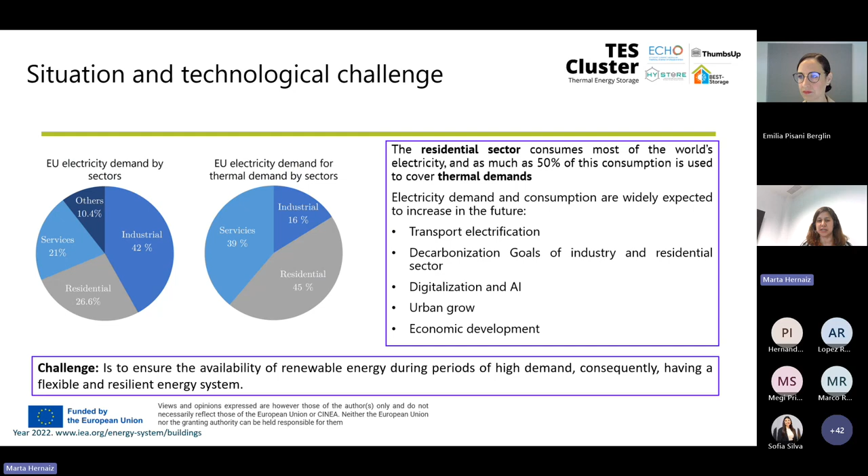This makes it essential to consider energy storage. As you all know, energy storage enables renewable energy to be stored and used flexibly, ensuring its availability during peak demand periods. There are different strategies or solutions to cover energy storage, both electrical and thermal. However, in the residential sector, where the demand is primarily thermal, thermal storage is the most suitable option.

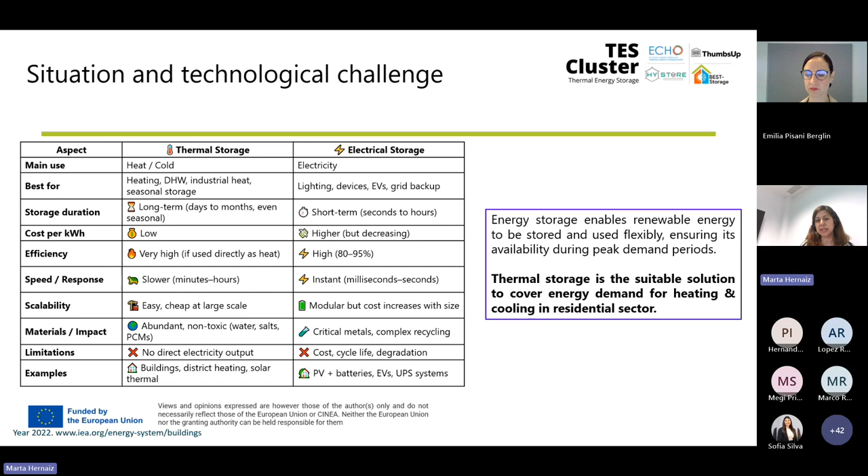This is the point where the BEST storage project emerges. One of the objectives of this project is to explore different alternatives to water as a storage material to meet the cooling demand. In this context, BEST storage has proposed two different alternatives, two phase change material slurry concepts, which are currently being studied by OST, Avanzare, and Tekniker. The main advantages of these slurries as storage materials are that the storage temperature can be adjusted to match the cooling demand temperature, a higher storage energy density, reduced operating cost, a more compact solution, and increased chiller efficiency.

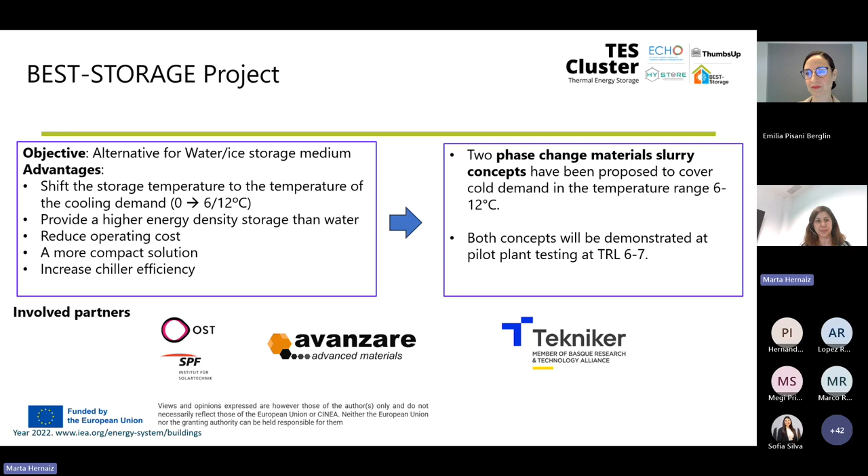In the second PCM concept, to charge the system, the liquid emulsion is pumped from the storage vessel through the heat exchangers, where the phase change material crystallizes, generating a phase change material slurry. This is a mixture of solid and liquid PCMs. This slurry is then pumped again to the discharge section where the solid PCMs melt again.

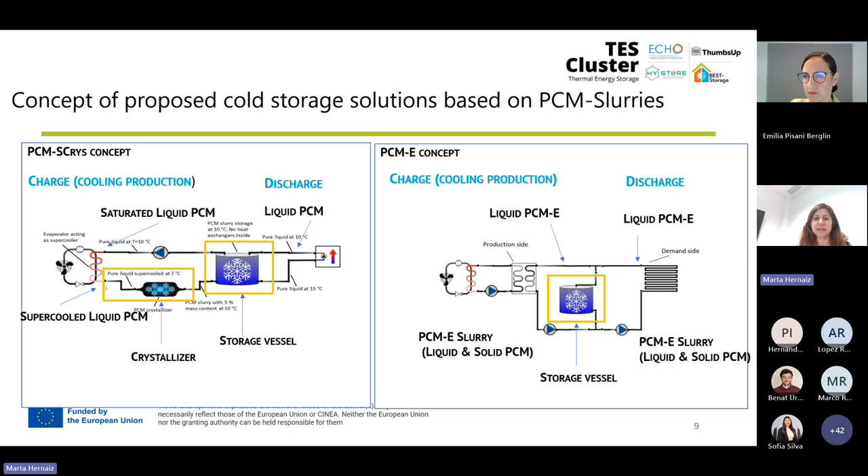If we look in detail at the first concept, the PCM crystallization concept, we have to remark on the following features: only a liquid PCM is recirculated through the system, cooled or supercooled, and in the storage tank, both the crystallization and the slurry management take place. To achieve the TRL of the system, we are working with a 500 liter lab-scale crystallization vessel for testing.

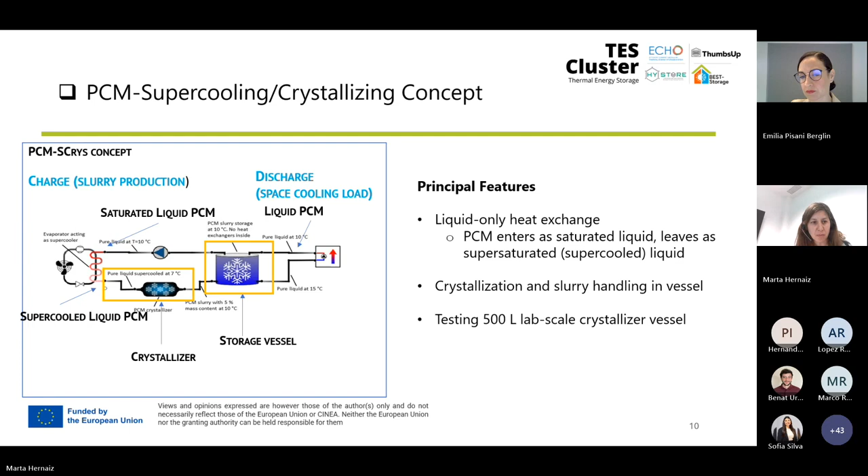For this concept, regarding the storage material, we have decided to work with inorganic salt hydrate salts. These materials are very interesting due to their unique properties: you can tailor and customize the phase transition temperature by working along the solubility curve with water. So depending on the water or coordination molecules of water, you are able to customize the melting temperature. The main advantages of this material are the high density they provide, the high latent heat linked with the storage capacity of the final system, the safety aspect, and also the stability and cost of these materials.

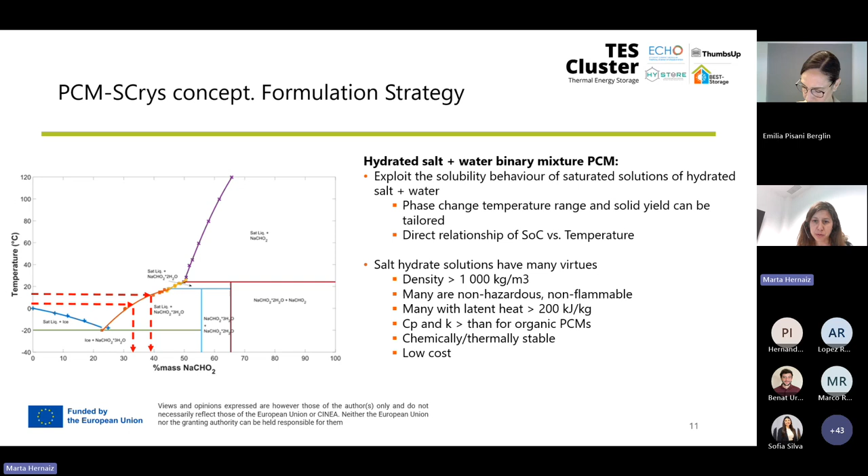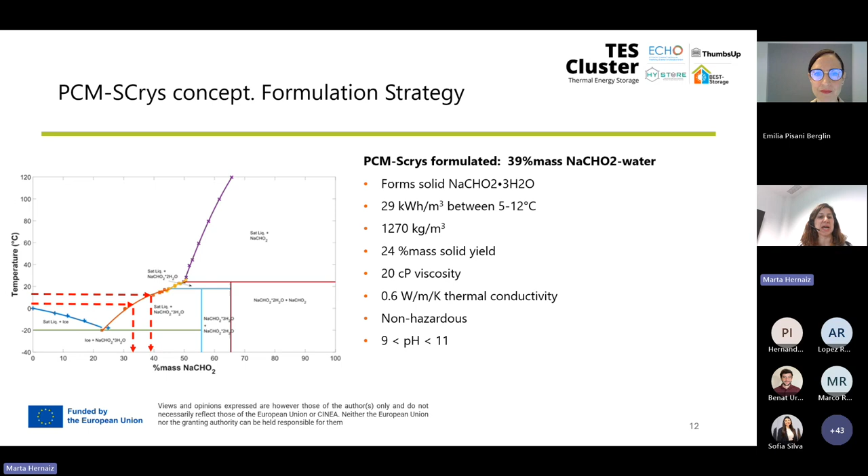Up to now, we have selected a slurry based on sodium formate, 39% in weight in water. This material has an energy density of 29 kilowatts hour per meter cubic, which means 5 times higher density than the reference material, water. Also, we have enough good thermal conductivity, very low viscosity, and we are handling a non-hazardous material in the pH range between 9 and 11.

If we move to the second concept, the PCM emulsion concept, the main features are that the slurry has a phase transition as it passes through the heat exchangers: a slurry containing a liquid PCM during the discharge system, and a solid PCM during the charge system is pumped. So we have to manage different properties of the slurry depending on whether the system is charged or discharged, and this affects the operation and also the design of the full system. To reach the final TRL, we are considering working with a 600 liter lab scale vessel.

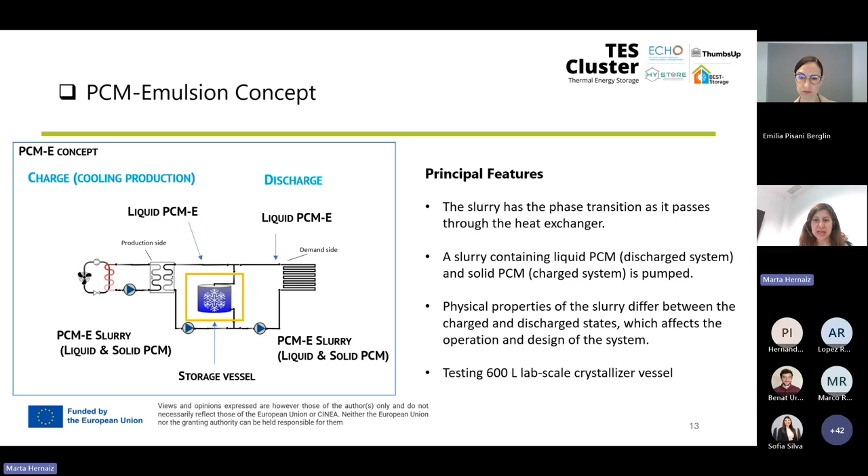For the PCM emulsion formulation, the formulation strategy is a key part. For this concept, organic PCM has been selected for emulsion formulation in water, and we have to consider the main specifications for the slurry: we need a liquid with high energy density, we have to avoid or reduce the supercooling behavior of the emulsions, formulate stable emulsions, and control the slurry viscosity. All these aspects must be considered during the formulation because they are directly linked with the design of the final system.

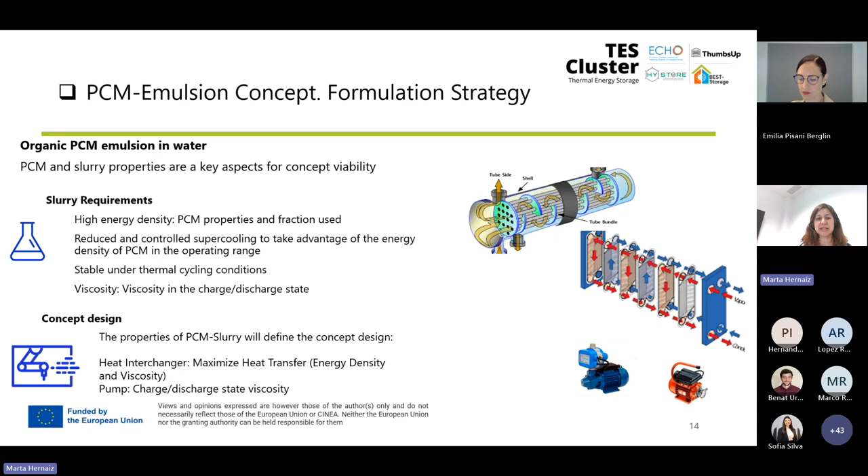And to select the critical components of the system, such as the configuration of the heat exchangers and also the pump, which are the key elements of the final system. So during the formulation, the most important properties that we have considered are the stability, the viscosity, and the supercooling.

But there is an important question: is it possible to obtain an emulsion that meets all of these requirements, or not? Is there any property that is more important than the others? During our experimentation, we found that it was not possible to meet all the requirements defined for the emulsion: very low viscosity, very high stability, higher energy density, and reduced supercooling, all at once.

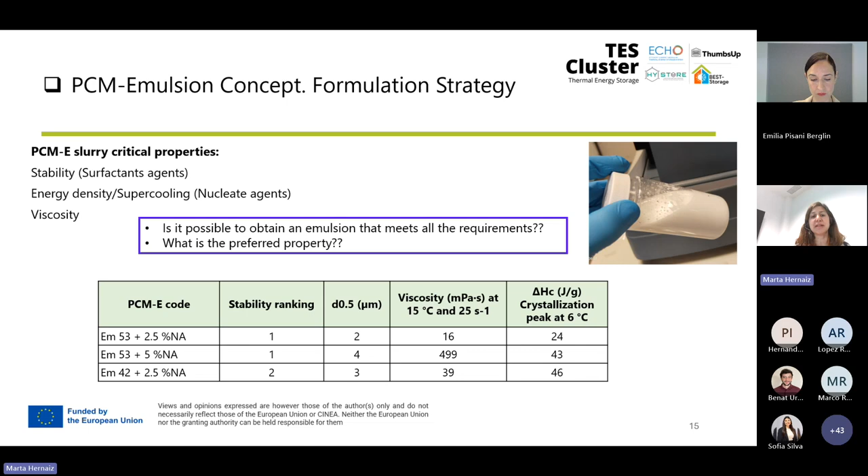So, to sum up, to achieve the decarbonization goals for the European Union, the energy sector requires energy storage solutions. Thermal energy storage is the best way to meet the heating and cooling needs in the residential sector.

In the BEST STORAGE project, we have developed 2 storage alternative concepts. The first one is a PCM crystallization based on inorganic salts, and the second one is an emulsion based on organic PCMs. Compared with water, the reference system, we have achieved a storage capacity higher by a factor of 5 and 3 respectively. So to achieve all these results, material science and also the system device design is a key issue to improve storage performance, and all the new concepts require a redesign of the operational system to adapt to the new materials and new strategies.

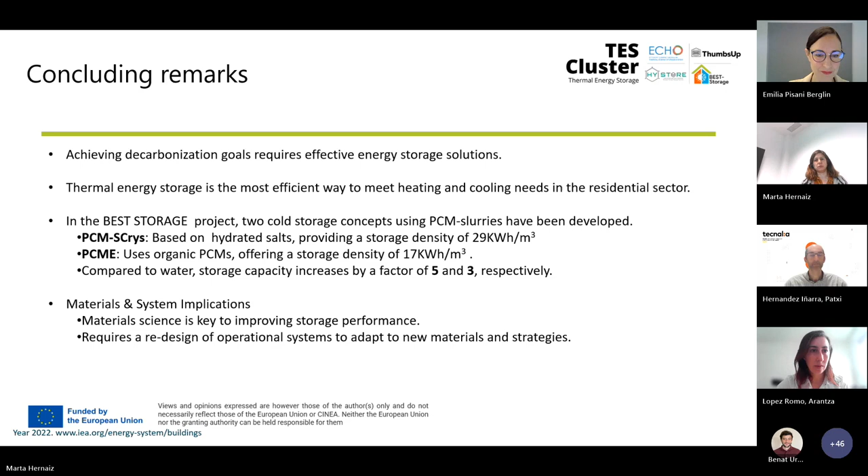Arantza, the life cycle greenhouse gas emissions of heat supply in buildings vary significantly across different countries and cities in Europe, from cities with efficient and decarbonized heating networks to those that remain heavily reliant on fossil fuels. The potential impact of thermal energy storage on decarbonizing heat supply must be carefully evaluated for each case, and this is what you're working on. In this presentation, you will explore the potential of thermal energy storage, especially the ones being developed by the ECHO project, to decarbonize heat supply in the city of Bilbao, Spain.

Currently, the city's heat supply is approximately 80% reliant on natural gas, presenting a significant opportunity for decarbonization. You will examine how conventional thermal energy storage and ECHO thermal energy storage, in combination with heat pumps, can support decarbonization. The analysis includes a prospective hourly evaluation of greenhouse gas emissions in the Spanish electricity grid until 2030. I will not give more details because I don't want to spoil the presentation, but please, Arantza and Patxi, the floor is yours.

Well, good morning everybody, and thank you, Emilia, for introducing us, and for the opportunity of presenting our developments at the ECHO project. I'm going to start with an overview regarding the ECHO project and the methodology that we are using, and then I will give the floor to my colleague Patxi, who will present the preliminary results that we are obtaining. Thank you very much also to Marta for presenting the challenges that this type of project is trying to address, which are common among BEST Storage and the ECHO project.

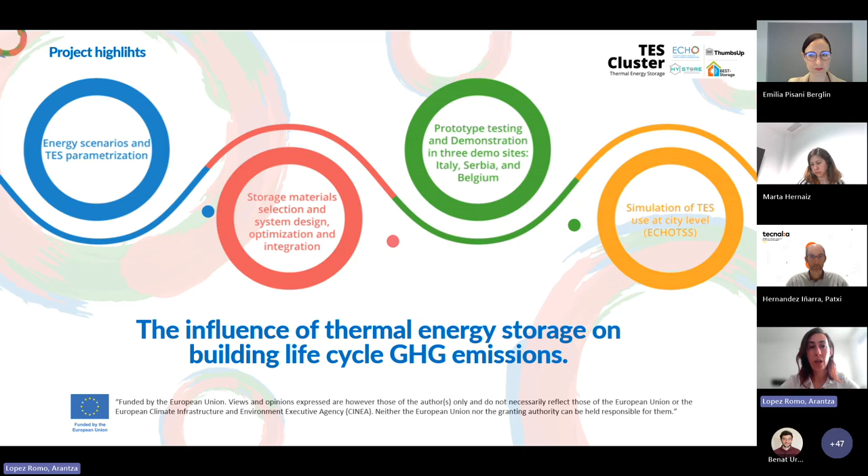In this type of project, we usually analyze the environmental impacts of the system under development by itself. But in this case, we aim to scale the analysis in order to try to understand the influence of thermal energy storage on building life cycle greenhouse gas emissions. For this purpose, we are including in the analysis 3 different cities, so we can understand the role that thermal energy storage can play in decarbonizing the heat supplied at city level.

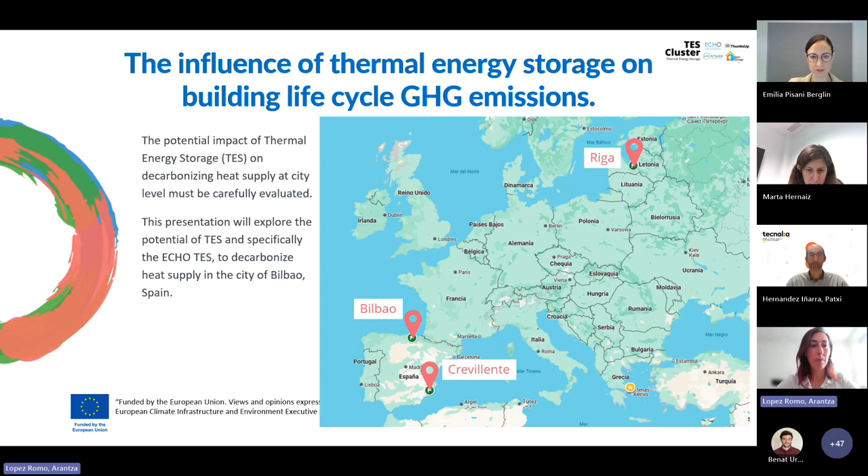In this specific presentation, we are presenting the preliminary results that we are getting for the case of Bilbao. Bilbao is a city located, if you don't know it, in the north of Spain. There are some issues regarding this, but what is most important is that approximately 80% of the heat supply is covered by natural gas, which means it presents a significant opportunity for decarbonization.

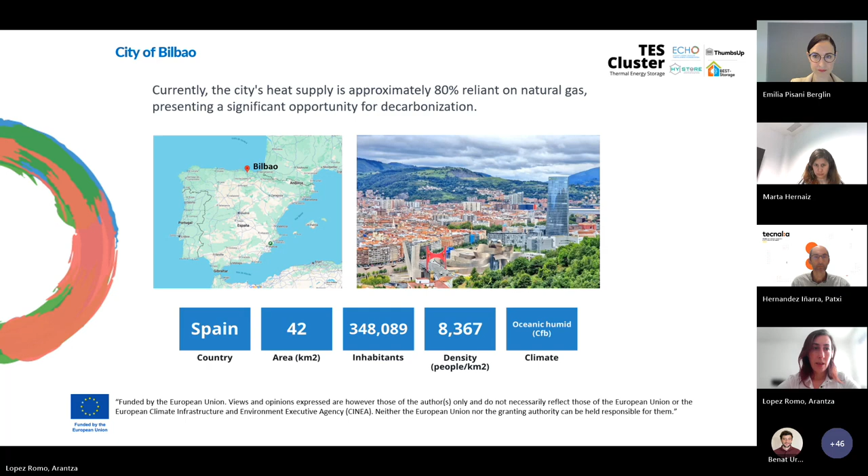But here we are using a quite innovative methodology, because we are considering a prospective energy generation at the use phase of the system. This means we are not only analyzing the electricity mix today in Bilbao, or the Spanish electricity mix nowadays, but also including what the Spanish electricity mix will be in 2030, with the aim of capturing the expected more renewable electricity mix we will have in the future.

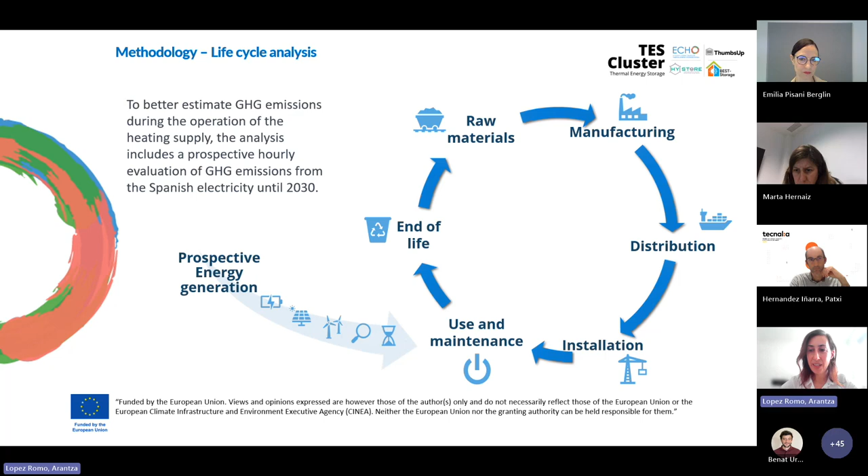And here is when I'm giving the floor to my colleague Patxi, who is going to explain further why it's interesting to include this prospective approach. Thank you, Patxi. Okay, thank you, Arantza. Can you hear me and see me well? So I will tell you the approach.

I will dig into the preliminary calculations we have done for the ECHO TES thermal energy storage, and compare it with more conventional solutions, like the one covering nearly 80% of the area in Bilbao, natural gas boilers for heating and hot water. We will also compare with a solution being implemented in some places in Bilbao: heat pumps with conventional thermal storage systems.

That is a big change and already has many benefits. So we will compare three things: natural gas, heat pump with conventional thermal storage, and heat pump with the ECHO TES thermal storage, which is the thermochemical storage. So how will we compare?

We will evaluate the electricity mix, how it is now and how it will evolve in the future, mostly aligning with the National Energy and Climate Plan for 2030, extended a bit to account for these solutions lasting 20 years. So over this 20 year horizon, we simulate how the electricity mix will evolve. In 20 years we hope to reach more than 90% renewables in Spain's electricity mix. We are already over 50%, and in 2030 we expect 80%, and by 2045, the end of this study period, we will be nearly or more than 90%.

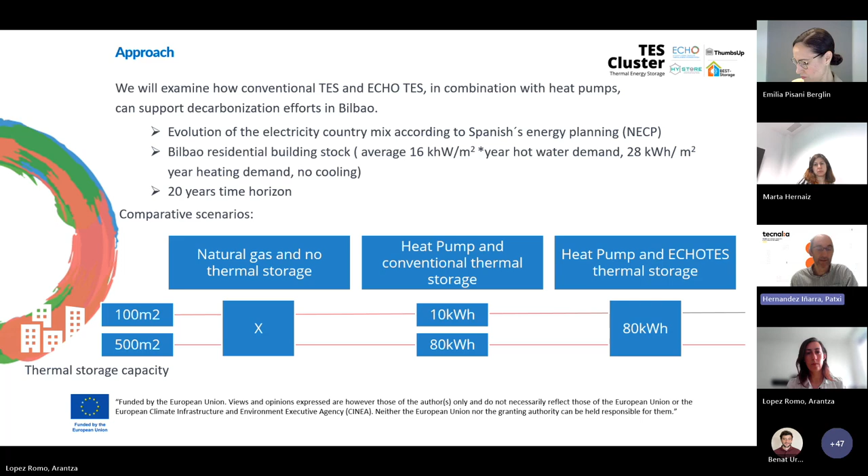So the idea is to compare our solution with conventional solutions using heat pump and storage of different capacities, and with natural gas, which normally doesn't need storage because they use high power boilers instead. That's how we will compare.

There are a lot of calculations and assumptions; I'll try to explain quickly how we do it. To operate a conventional storage with a heat pump, you see at the top the black hourly data showing electricity use to operate the heat pump with storage, and at the bottom the yellow line showing the storage capacity going up and down — a conventional storage charging when electricity is cheap.

In most electricity markets, including Spain, when electricity is cheap there's a higher percentage of renewables in the mix. So we know the storage charges mostly with renewable energy, which is cheaper and has lower environmental impact and lower greenhouse gas emissions. That's the conventional storage with a heat pump, charging and discharging in daily cycles, using mostly renewables. Then we compare if that building instead used our ECHO TES thermochemical energy storage solution, which has much higher capacity. These prototypes are being developed with the idea of higher density, so we could use higher capacity within the same building.

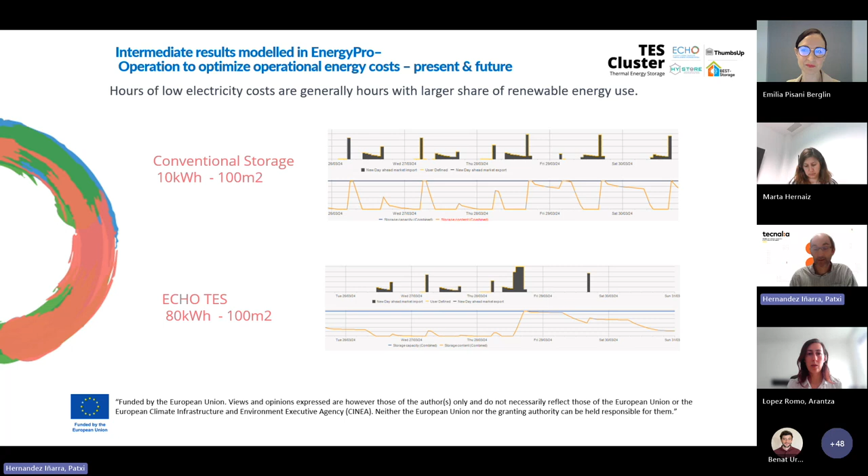That's the idea of a higher capacity of thermal storage - to be able to use renewable electricity for longer. If we look at the results, the greenhouse gas emissions of these three different options - of course natural gas - this is in kilograms of CO2 per delivered kilowatt hour of heat, for each kilowatt hour delivered to the hot water or heating systems.

A gas boiler, we know, has like 0.23, or more than 200 grams of CO2 per delivered unit of heat. That's for the operation of the gas boiler when burning natural gas. For the manufacturing of the gas boiler it's not really much - just a bit of metal, let's say - so compared to what's emitted burning the natural gas, it's not so much.

And what happens when we use a heat pump and conventional thermal storage? The blue part, the operational emissions, due to heat pumps using electricity which is mostly renewable, are reduced fivefold or more. So this is a lot of reduction in operational emissions. There is an increase in the manufacturing of the equipment, because the heat pumps, refrigerants, and storage systems have an impact on manufacturing.

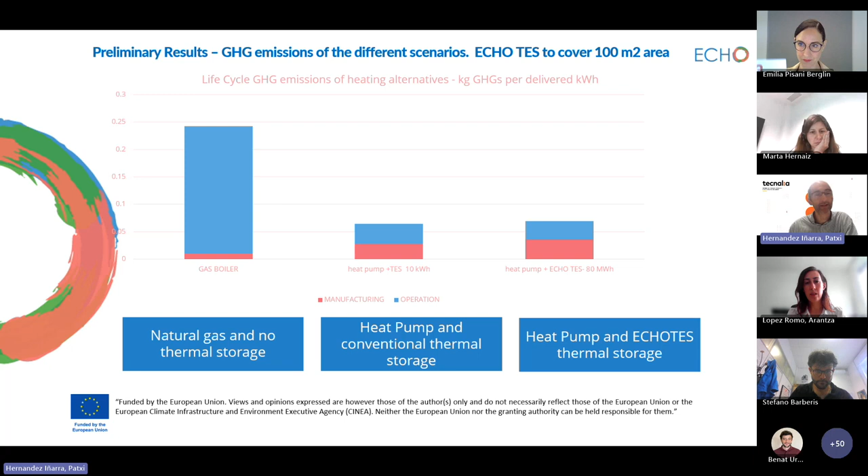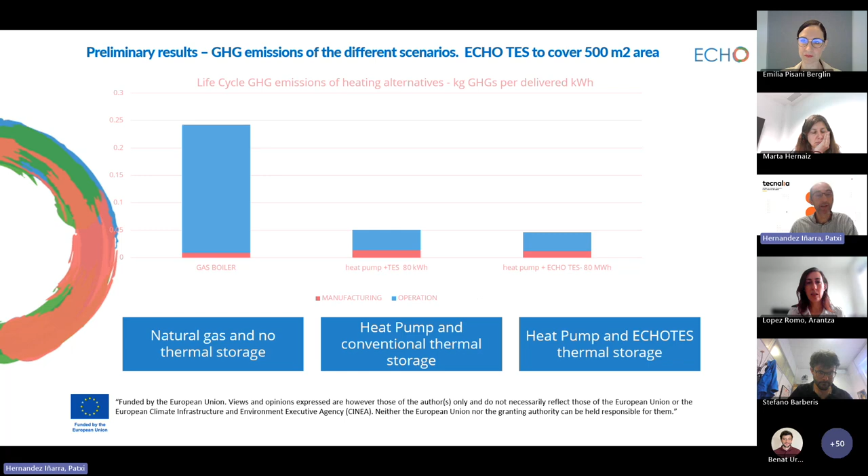Okay, to finish up, because I don't have much time - if we compare that with a larger area building, applying the ECHO TES system, we see that the operational benefits are not as much because we become more comparable to conventional thermal storage, but the manufacturing emissions are also similar. So the ECHO TES could be an option for some building sizes when you need a compact system with stable temperatures and the additional benefits thermochemical storage can give you.

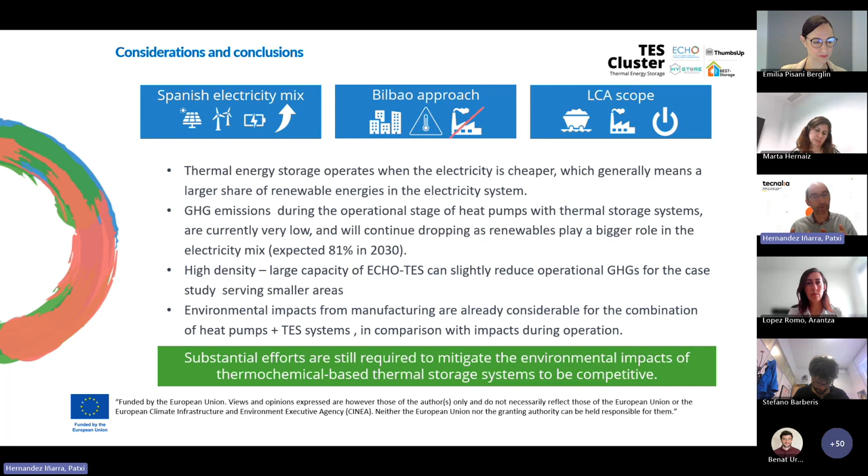So these are the conclusions, but I think I already mentioned them, so I'll just look at the last one. There are potential benefits for this compact thermal energy storage. Thermal energy storage in general with heat pumps has a lot of demonstrated benefits, but for the compact ones there are additional benefits, and we have to make sure we focus on reducing the environmental impacts of manufacturing those thermochemical storage systems.

And some next steps that we still have to test - we are at the simulation stage, so we will do more work for this research with other uses, other cities, and try to estimate the benefits on the electricity network. That's an important issue - coordinating many thermal storage units in a city can support electricity grids as well, which would be an additional environmental benefit by reducing the construction of more electricity grids. We have to quantify that as well, but that will be next steps. Thank you, that's all I think.

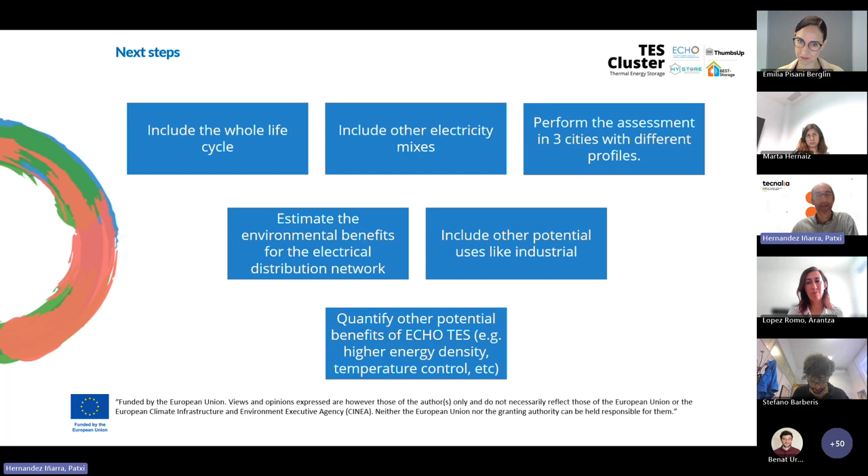I would like to pick up right away on one of the last things you said, Patxi, about the manufacturing impact. This is the whole point of this webinar - right now it's one thing when you have the manufacturing impact of a prototype, finding the right resource providers. How do you see this manufacturing changing when we manage to have larger scale production with more stable, more accustomed service providers, let's say?

Yeah, I think for thermochemical storage, it's still a low TRL, and we still have a lot of research to do. We are even at a lower TRL than the PCMs, from what I know. So there is still a lot of improvements to do. We are working at laboratory scale at the moment, so the impacts being shown here are from those prototypes. We hope we can greatly reduce that if it's produced at mass production scale.

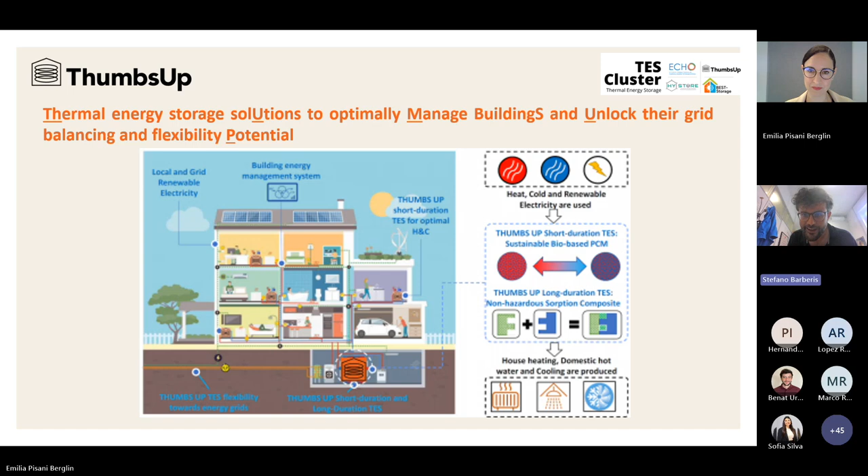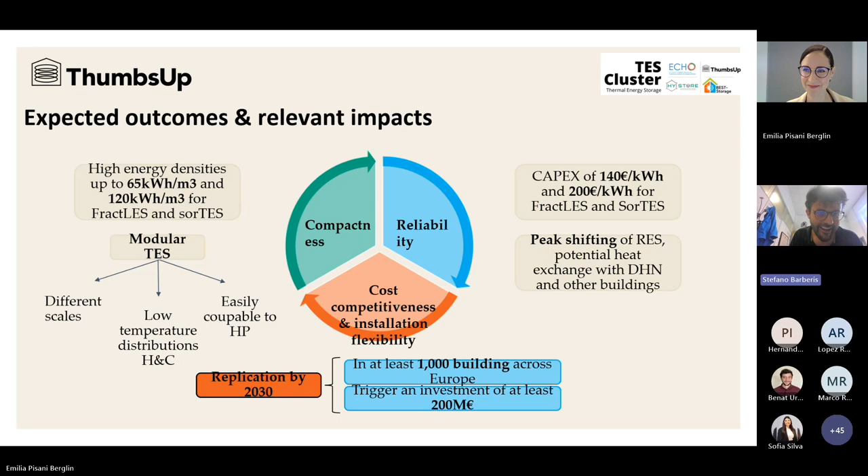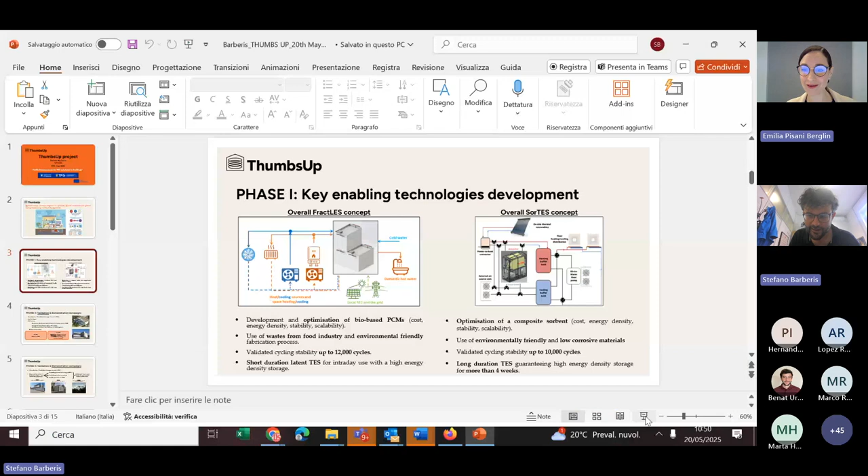I think there has been a mistake because I prepared a different presentation. Maybe I attached another one. May I share my screen? Sorry, I cannot find the correct one. Most probably it's my fault, but I cannot recognize my slide, Emilia. Sorry for this—this is the introduction. Things happen, sorry. While you continue showing your screen, I can finish introducing you. Yes, you have it now. Great, I have everything there.

So as I was stating, the idea is that we are going to develop these two types of thermal energy storage solutions. One based on phase change material, as you could see in the slide, also quite compact, as a sort of box that you can put in your domestic warehouse, for example.

And the other one, named SorTES, is as I said more for long duration, based on sorption TES. Both solutions are very sustainable from an environmental point of view because they are based on natural materials—in one case fatty acid, in the other case water-based and zeolite solutions.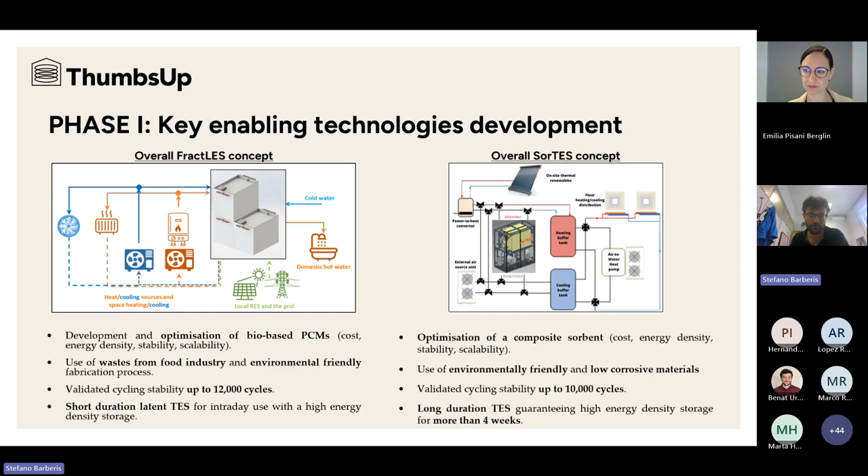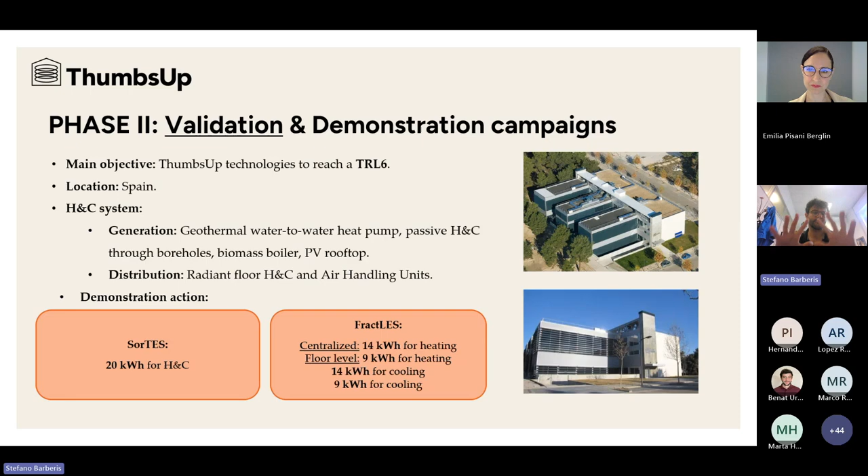The goal of the project is mostly to work strongly on validation and demonstration. We will first validate our solutions in CARTIF Research Center at a more compact size, but we will then go into real demonstration cases in single-family houses in Spain, multi-family houses in Spain, and also multi-family houses connected with a district heating network in Sweden.

As you can understand, we are already in our demonstration campaign targeting different types of buildings and different types of connection with heating and cooling solutions. Why this? Because we strongly focus on the replicability of this technology.

So we don't want to make a demonstration that is just for the project. We really would like to check and see which are the best types of buildings where to integrate our thermal energy storage solution, which are the best energy markets, and also energy market boundary conditions where our thermal energy storage can be effective, and also if our type of thermal energy storage can coexist with other types of energy efficient heating and cooling solutions, like district heating networks, and most of all, heat pumps.

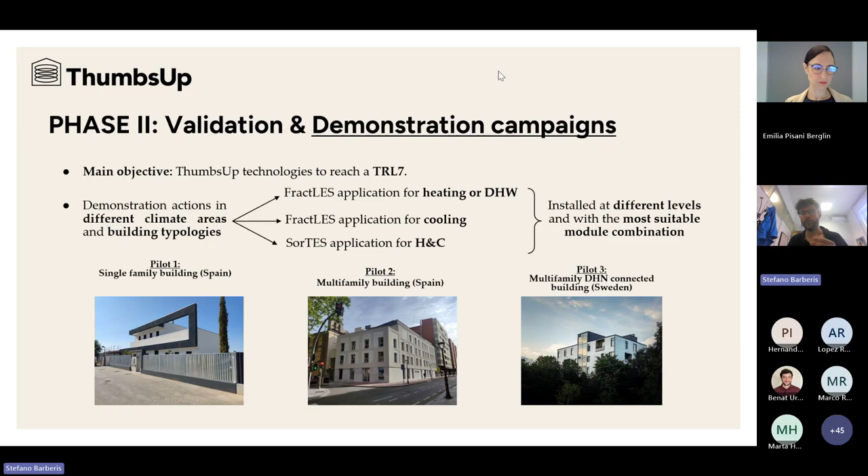As I said, the project is very focused on replication, and we are targeting a replication campaign where we will study via simulation tools the application of our technologies—tested in Spain and Sweden—also in the Netherlands, in two different types of buildings in Italy, both single-family houses and multi-family houses, and also in Greece and Estonia, checking different types of climates and energy contexts.

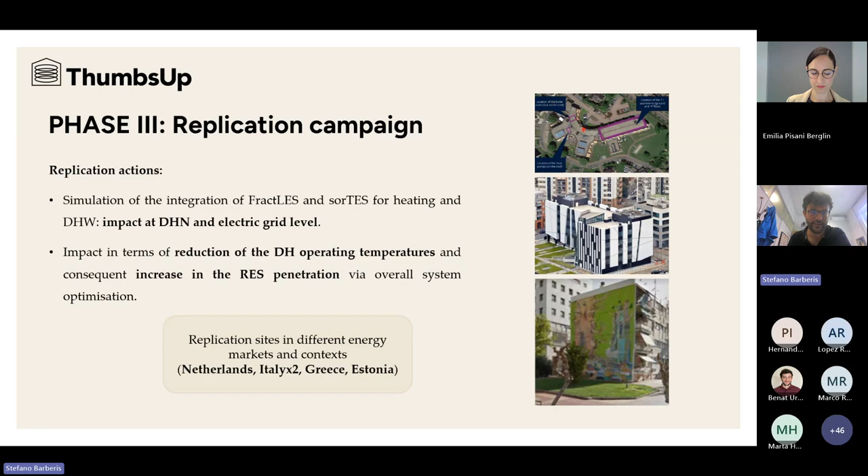If we would like to implement our ambitious replication roadmap, of course we need viable business cases. As I mentioned before, we need to investigate which are the best energy market conditions, but also which are the best building sizes and conditions in terms of heating and cooling installed application, also because theoretically our thermal energy storage can be applied both in retrofitting, so in already existing buildings, as well as in newly built buildings.

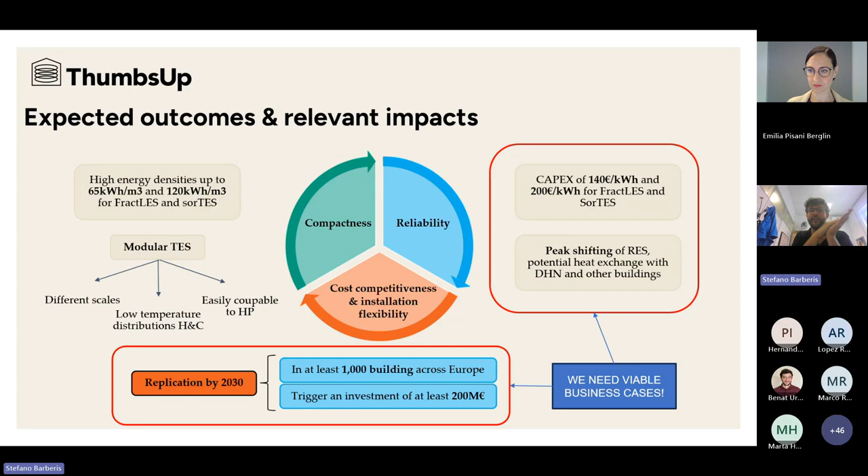In this sense, as University of Genoa, we worked on a thermoeconomic model in order to investigate our business case, to understand, starting from the analysis of the demo site, if our thermal energy storage can effectively support the decarbonization of the heating and cooling system in buildings, but most of all, if the thermal energy storage can develop a viable business case.

Here you can see a sketch of our W-ECoMP modeling suite, these thermoeconomic models.

What I would also like to state is that our technologies are effective from, for example, energy storage capacity point of view, compactness of storage, sustainability from the environmental point of view. But at the same time they do have some cons, some drawbacks. One is that while the energy storage capacity is quite high even with limited volume, unfortunately the thermal power capacity is limited, so I cannot exchange large amounts of heat between the heat pump and the thermal energy storage.

Furthermore, for what concerns the SorTES, the sorption-based solution, we need to consider operating the system to exploit it effectively, charging for a minimum of 3 hours along the day. So these are the technological limits. There are also technological limits related to the maximum state of charge and the minimum state of charge.

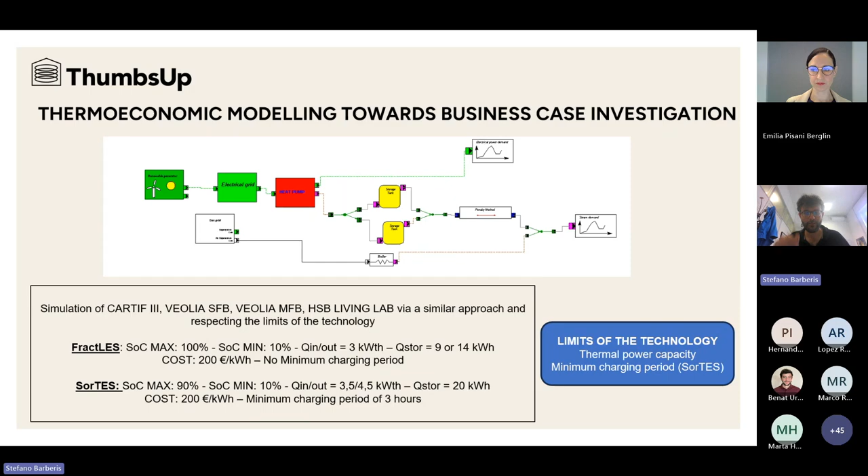Knowing these constraints, we implemented and sized, thanks to W-ECoMP, starting from the real thermal energy demand of the different buildings of our demo sites, the optimal size of both the FractLES and the SorTES, having in mind that theoretically the FractLES should operate more at daily level and the SorTES more at a longer duration level, like weekly based.

We operated on a weekly basis, so we took a typical week of the heating demand of all the heating months of each building, for which we had this type of information from our demo sites, and we sized the different TES for all the buildings.

For example, in the case of CARTIF, we saw that the role of storage has mostly been to maximize PV self-consumption and store the excess of PV production, particularly during the weekends. Another role the TES had was to optimize, during the peak moment of the demand, the heat pump operation towards higher COP, moving towards nominal COP.

So in principle, the idea in this case of CARTIF was to work on, due to the fact that the building is not in use on weekends, maximizing operation along the weekend and exploiting the PV production that otherwise would have been wasted, as well as optimizing energy efficiency.

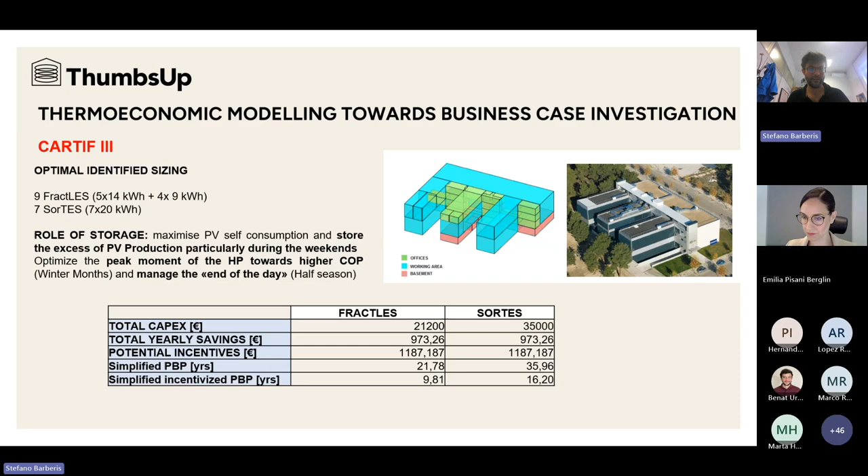We did a similar analysis with the multifamily building by Veolia in Valladolid, where, differently from CARTIF, there is no major weekend effect, since the building is used all throughout the week. Here again, the role of storage was to maximize PV self-consumption and optimize the COP at peak moments.

Unfortunately, due to the high thermal demand of the building, since it's a large-scale building, we need a large investment for CapEx, and the savings are not so large. So the payback period, even with the incentive, is not so promising.

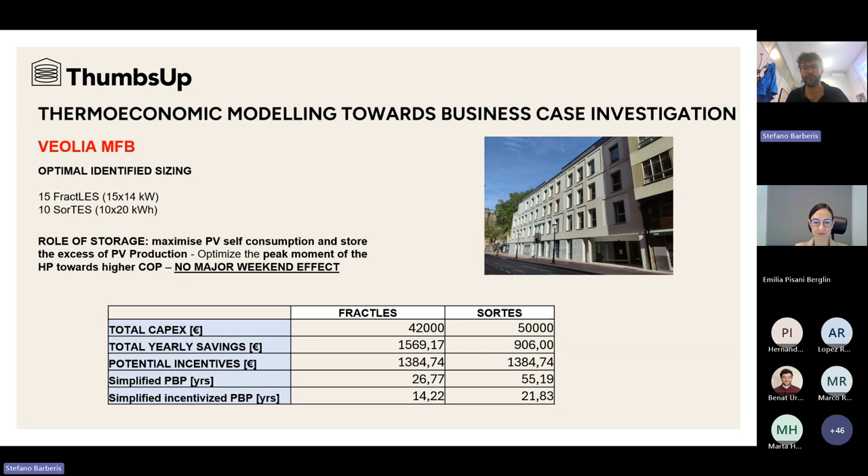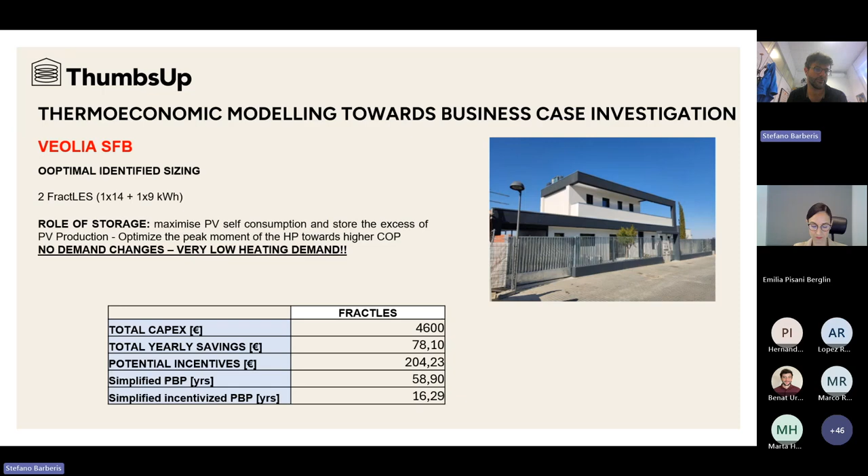If we look at the single family building of our demonstration project, we are dealing with a very efficient building with a very low heating demand. In this case, the role of the TES is mostly as a tool that enables maximization of PV self-consumption. Without incentives on self-consumption, the payback period is very, very bad. Last but not least, an important case is the Swedish one, where we are somehow competing with the district heating network.

Actually, what's interesting is that there is no conflict with the district heating network, because the cost of district heating thermal energy is higher than the cost of electricity. Here, as we are working with a heat pump, which is a sort of multiplier of energy from electricity to thermal energy, at the end of the day the TES can work effectively without competing with the district heating network.

So here, for example, in the case of HSB in Gothenburg, the role of the TES was to optimize the peak moment of the heat pump towards higher COP, and also in mid-season, maximizing the photovoltaic self-consumption, even if you have to consider that in the case of HSB, we do have also a battery. So the role of the TES was mostly to cooperate with the battery, particularly in periods where heating and cooling is prominent.

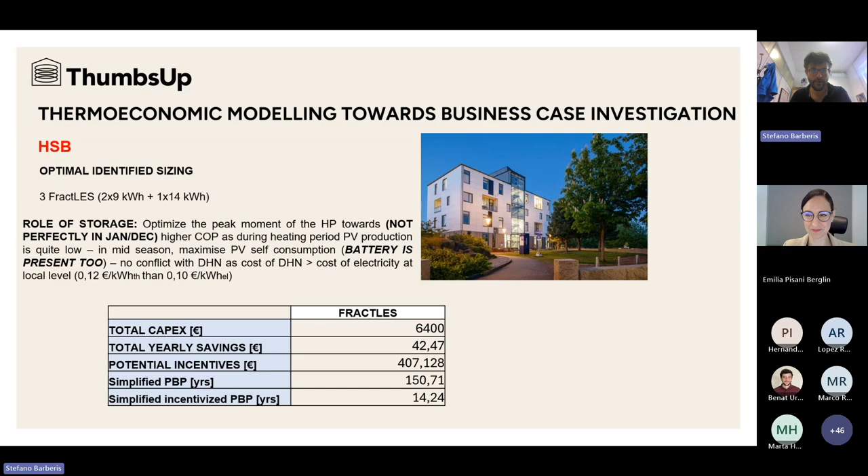So just to wrap up, as you could see, we can state that if we can somehow use our TES as a sort of daily or even weekly shifting solution for PV maximization, this could be the most relevant purpose of our TES, particularly if we are able to exploit incentives. And if we have high efficiency buildings with very low heating demand, this can really be the only way to exploit the TES from a remunerativity point of view.

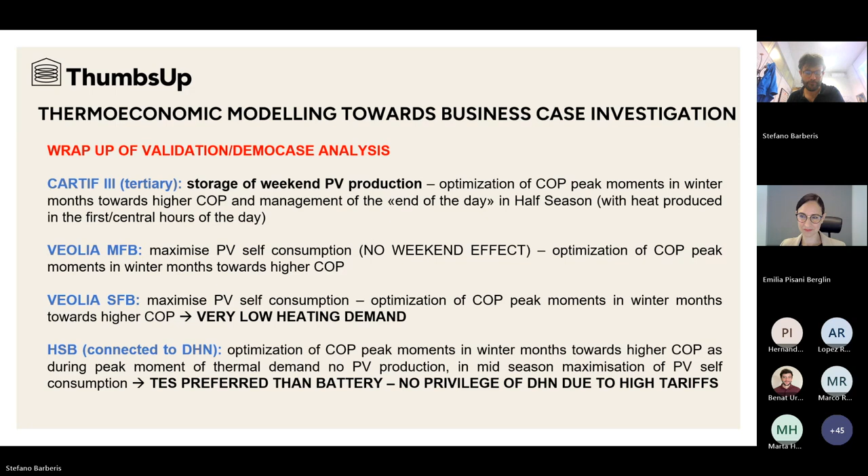What I would like to say is that, according to this analysis, we can try to extrapolate some guidelines for viable business cases for application. One is the fact that due to high capex and limited thermal power heat capacity of our thermal energy storage solution, we should really wisely target which are the buildings where we would like to integrate our TES solution, as our TES are quite capex intensive.

And according to the presented thermoeconomic assessment, it is clear the importance of perfectly sizing the thermal energy storage with the size of the heat pump and with the size of the photovoltaic, in order to minimize the payback period. In this sense, it's easier for sure to set up viable business cases in newly built buildings, where we can play on each of the pieces of the puzzle more than in retrofitting, as we are doing in this case.

What is also crystal clear is that power-to-heat for this type of capex intensive storage is the key function from a remunerativity point of view, more than maximization of energy efficiency of the heating and cooling system. So most probably ESCO business models for this type of technology are more complex to apply, while other business models like aggregation, or more electric market-oriented business schemes, could be more viable, also having the chance to maximize self-consumption incentives like the Italian Renewable Energy Community or other self-consumption incentives currently promoted in Europe.

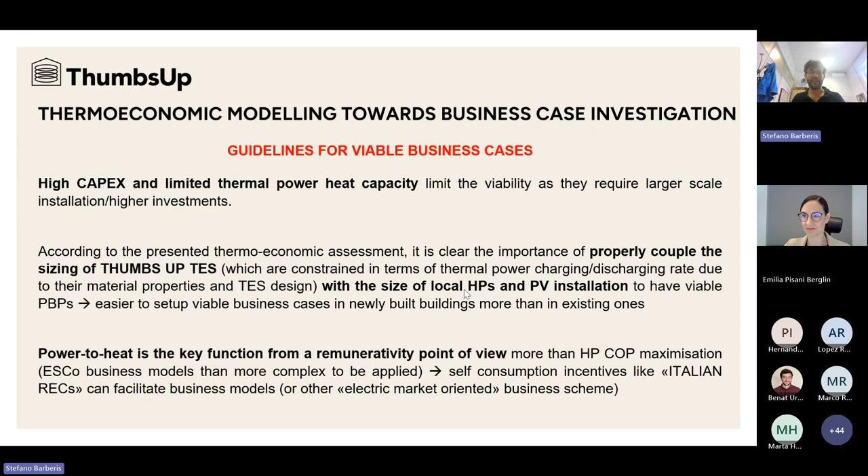I hope I have been concise and clear. Thank you for your time, and if you have questions, I'm here.

Thank you and very sorry, again Stefano, for this technical problem. I think there's no webinar or digital event, or physical event, without some sort of issue, but we brilliantly covered it in any case. So thank you very much.

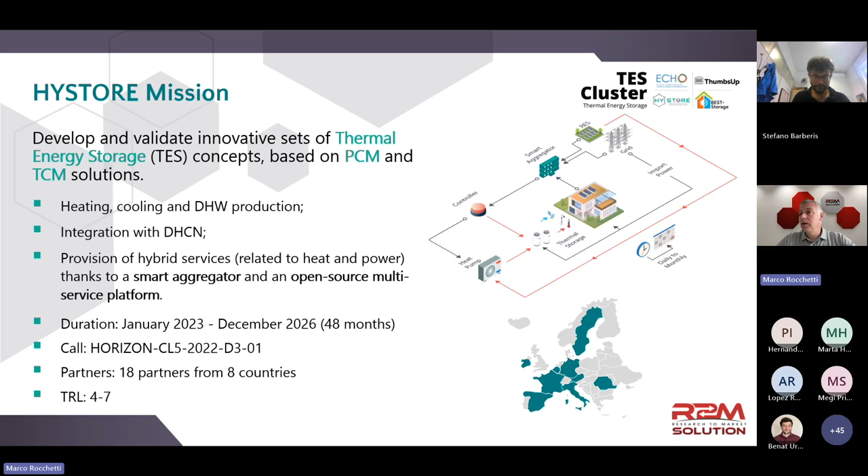Some objectives: we want to demonstrate a plug-and-play solution for different climatic zones. We want to validate the solution at pilot level in Sweden, Spain, Austria, and Ireland, with optimized strategies for the control of building consumption. Objective number 4 will be the demonstration of scalability and replicability of this solution and its integration at building level.

As for impact, we want to achieve 120% energy density with respect to water-based solutions. We want to reduce capex by roughly 50% compared to common thermal energy storage, not considering water-based solutions. We want to reduce installation efforts, and our approach will be to provide a solution that can be competitive with lithium batteries. So this is probably a big challenge.

In the European context, how can we imagine this kind of solution? We have to think about the European context and the priorities we need with respect to the energy sector, and not only the residential sector but at a general level.

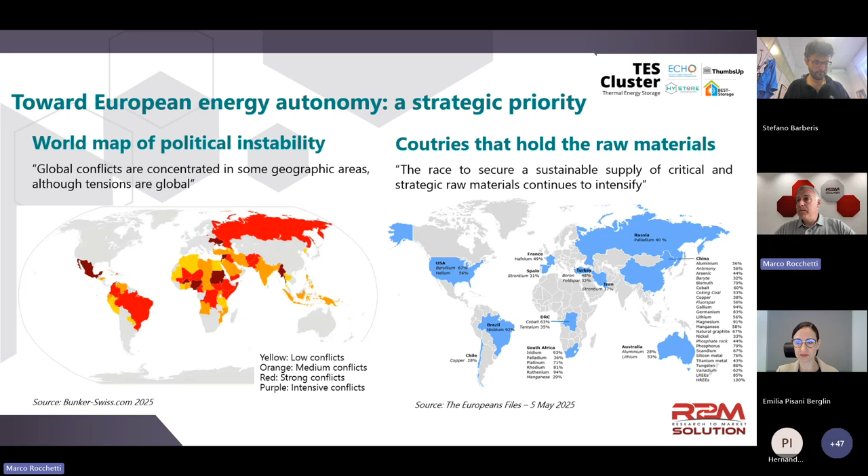An example of the problem generated by this strong dependency: the Nord Stream attack and the effect that this political instability can generate in the market—in this case, European gas prices. The cost of natural gas went from 25 euros per megawatt hour to roughly 250. This means these changes create instability not only at the residential level, but in the whole European economy, affecting the production of goods and services, reflected everywhere.

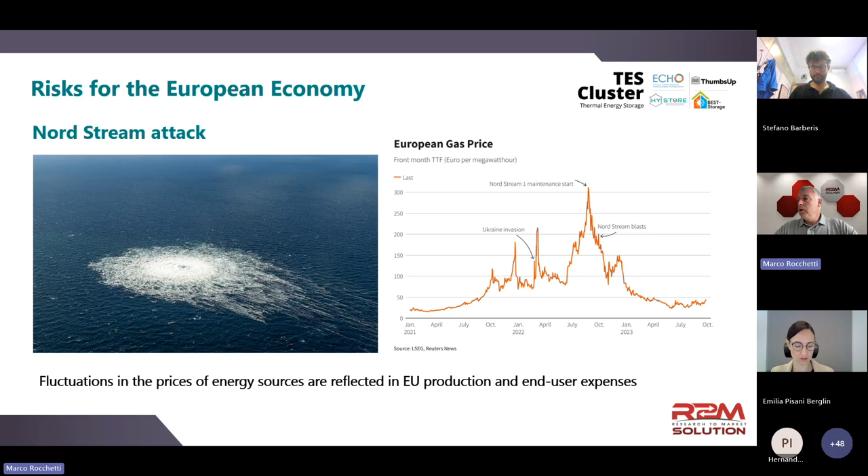So if we want to reach the sustainable goals that the European Union promotes, we have to push circular business models that are an innovative approach for producing goods and services in a sustainable way, without strong dependency on countries outside Europe.

It means that we have closed the loop with resources that are available inside Europe, or we can generate inside Europe by different kinds of strategies. Some pillar strategies are recovery of goods, regeneration of technologies, goods, and recycling. So recycling is fundamental in order to promote the sustainability of not only thermal energy storage, but energetic technologies.

Another point is to develop a sustainable design, because we have to think about circularity from the beginning of the business model. We have to promote maintenance in order to guarantee the circularity. Second life is an important strategy, and reverse logistics are fundamental to maintain the circularity. Added value created by this approach is reflected not only at environmental level, but also at economic and social level.

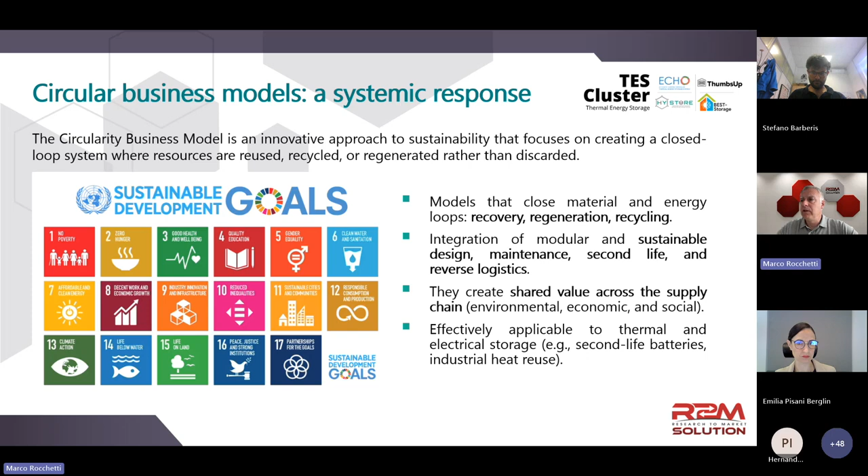Now I want to present the applicability of this circularity business model at thermal energy storages. Storages in general are already included in this kind of business model. For example, we have seen that this approach is already available for lithium batteries, which is a consolidated example of sustainability. The approach is to collect positive feedback, positive experiences from this kind of consolidated technology, and push this business model to thermal storages.

It can promote the recovery of heat from industrial processes, and the integration, obviously, with district heating networks, which can create a positive booster for the circularity business model and the integration of thermal energy storage in the European market.

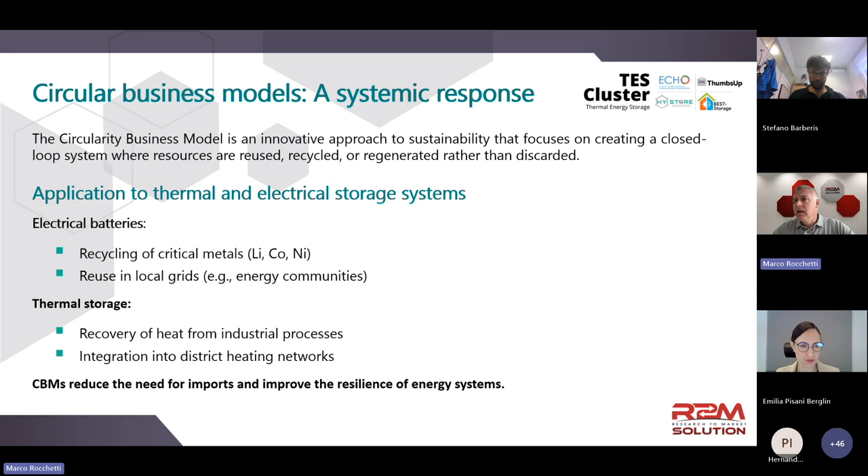In terms of policy that can facilitate this approach, I want to present the extended producer responsibility that, from my point of view, is fundamental to push this circularity business model. The extended producer responsibility is an environmental approach that connects the recovery of goods to the producer. This is at the moment a voluntary approach in some sectors, but in other sectors it is mandatory. It is important because it can facilitate circularity.

The recovery in this case is the responsibility of the company that produces the goods. And then we can follow two different ways: we can recycle some raw materials, obviously not the entire product, but we can disassemble and recycle material that can be reused in the second life of the material cycle.

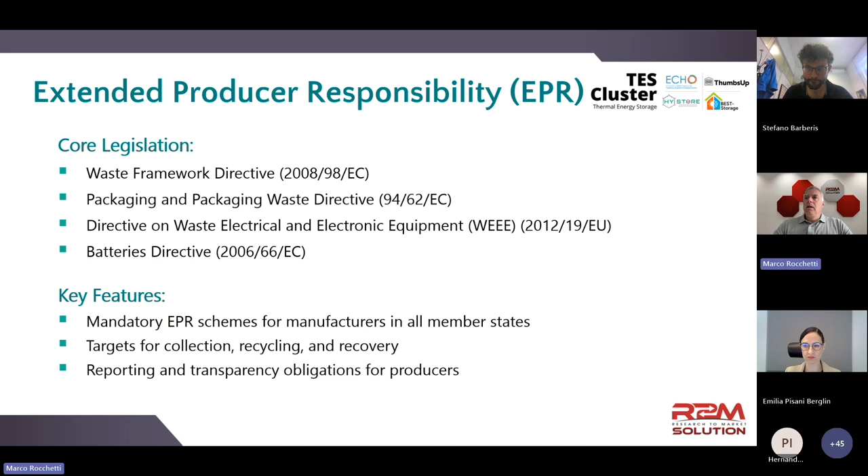In the future, as said, this is becoming mandatory for all member states of the European context. The targets are based on collection, recycling, and recovery of raw materials. It's another good point to mention that this approach can facilitate reporting and transparency, which is an obligation from producers. So this is a positive approach that can facilitate also other industrial activities.

Another point that can facilitate this approach is the product passport, which in some situations is mandatory, for example for batteries, lithium batteries. Analyzing the literature, we have seen that this article is very important. The title is 'Enabling the Circular Economy of Solar PV through the 10 R's of Sustainability.'

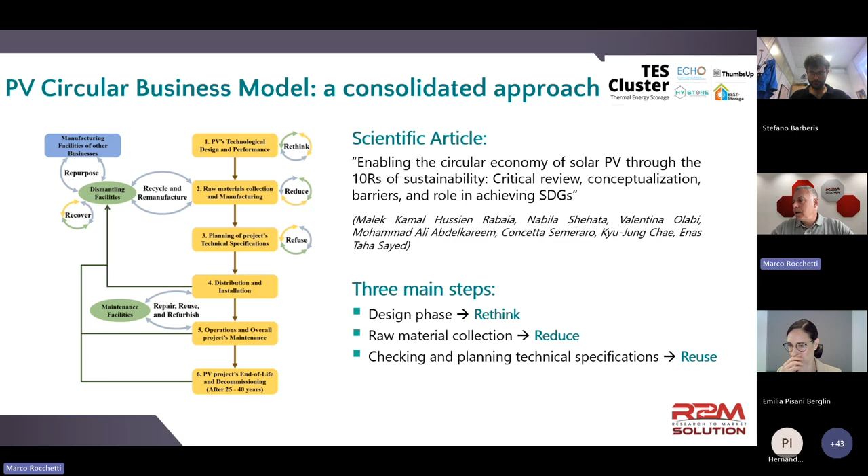Now I want to present two use cases, which we see very much in the technologies being developed. I know you have a couple of slides left, but I'll kindly ask you to go quickly through them so we have time for a little discussion at the end. Thank you. So, two examples.

The first is First Solar, a leader in thin PV films. They implemented this approach and use raw materials for the production of other goods, for example glasses, semiconductors, or encapsulation materials. On the left, you can see the efficiency they reached, recovering 90% of materials.

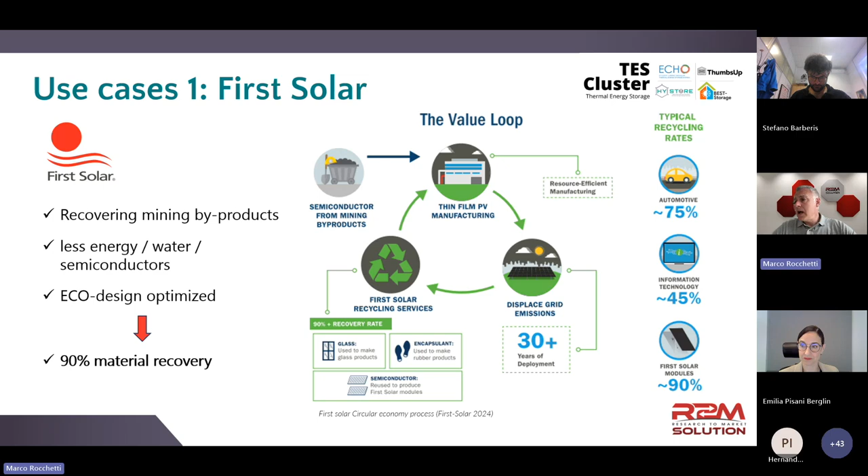Another good example, related to batteries, is the MIDAC approach. Here you can see the application of a second life approach. It means that, through extended producer responsibility, they can decide to reuse batteries - obviously not at full capacity - moving them from the automotive sector to the stationary sector.

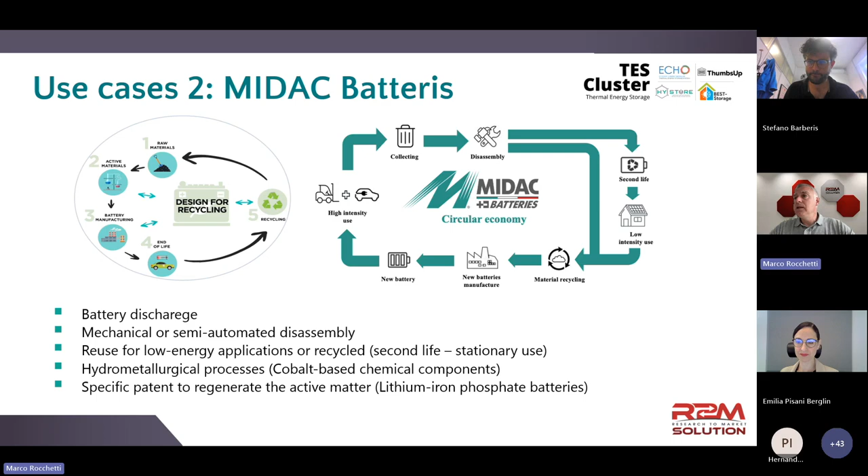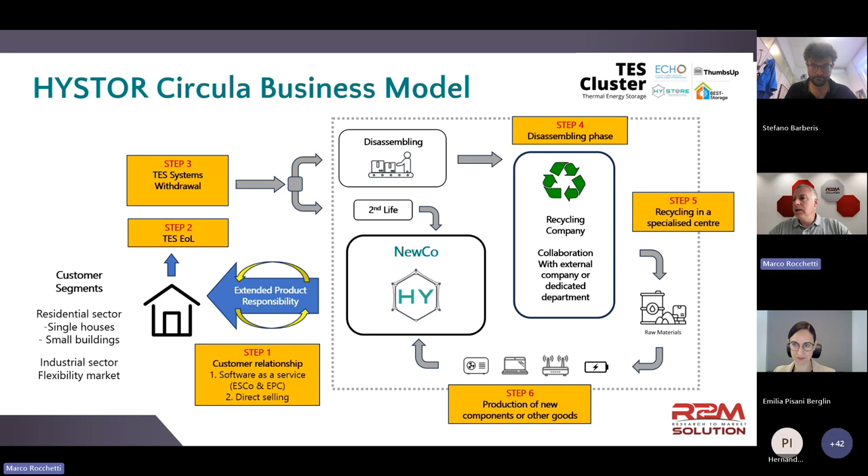These are two interesting approaches that can facilitate our business model, presented here. We think about a producer, which can be a newco, that wants to operate in the market with extended producer responsibility, meaning we sell the product, create a relationship with the customers, and are responsible for withdrawing the goods at end of life. At this point, we have to choose whether to apply the second life approach or disassembling. Disassembling means we need a strong relationship with a recycling company, and from there the cycle can be closed through recycling of raw materials and their reuse in the same or other industrial sectors.

Weaknesses are represented by the market, since market flexibility is not harmonized inside Europe. We don't have much experience with operation and maintenance costs, and, as seen in previous presentations, CapEx costs at the moment are very high compared to common technologies. So that's all from my side.